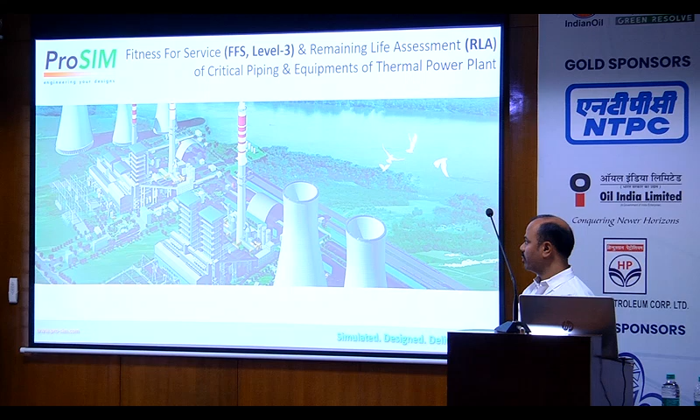This image is the typical layout of a coal-based thermal power plant. It has different systems, starting from coal handling, ash handling, boiler, turbine, generator, cooling system, and other supporting systems.

Some of these systems are subjected to mechanical loading, and some are subjected to both mechanical and thermal loading. I'm referring to the loadings because when systems are in operation, it's very complicated to find out the remaining life assessment of a particular system when it is subjected to both thermal and mechanical loading, as compared to systems subjected to only mechanical loading.

In general, most coal-based thermal power plants are in operation beyond their design life. This is because of one concept, that is return on investment. They invested huge capital on the plant, and that system needs to be in operation for a certain extended period of life.

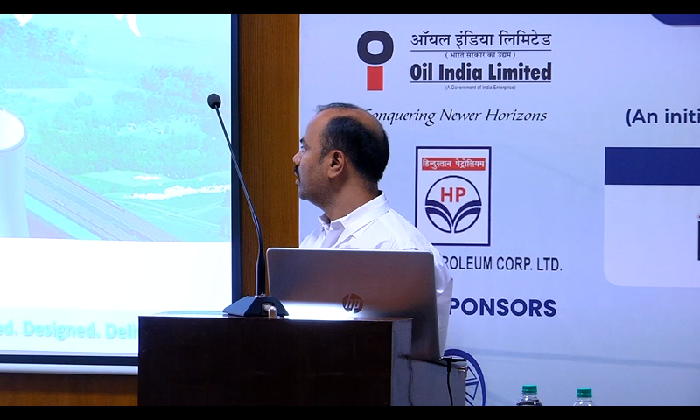In this context, we have done extensive work on remaining life assessment and fitness for service of some critical piping systems, and we have suggested design modifications and improvements using guidelines from different codes and standards. This is not only based on standards, but also actual data collected from sites, NDT techniques, and outcomes from NDT.

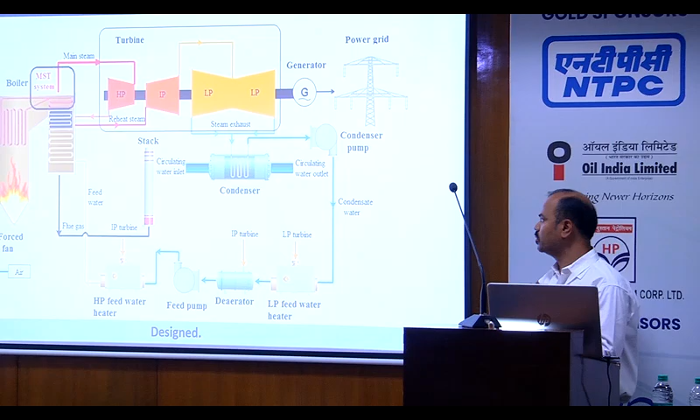Having said that, these are the major systems in coal-based thermal power plants. In this talk, I'm going to touch on only two critical systems.

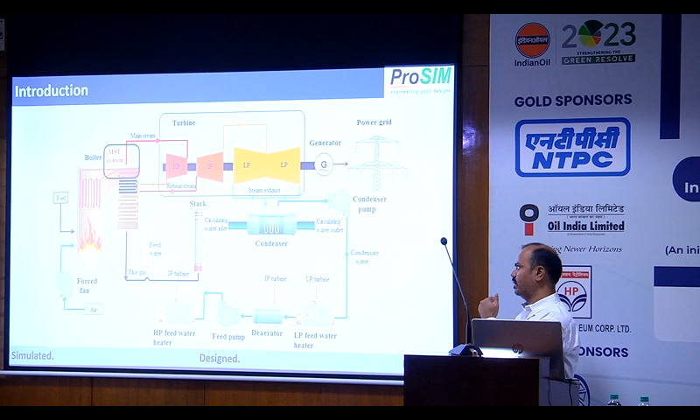One is piping systems, which are connected from boiler to turbine, and then turbine components. This includes both LP and IP turbine components, rotors, and casings, both inner and outer casings.

How do we do that? How do we assess this? The assessment process is very complicated, so how do we go about it?

With extensive work in this area of assessment and remaining life assessment, we have been able to generate a workflow chart showing where we should start, using different standards and codes. This is because once we have the system, if it is safe for the next couple of years of service life, then we have a basis for that.

For that, we referred to so many standards and codes available, like ASME and API, and some codes from RCC-MR. This is because creep-related properties are very difficult to get from ASME.

I'm not going into detail on each and every step, but I'll take you through a simple example for each step which we have done.

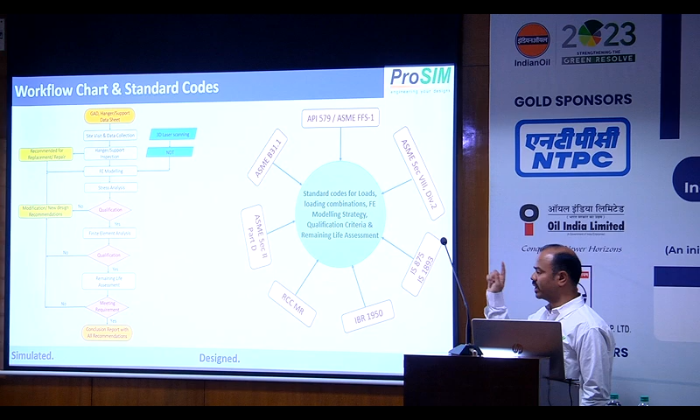For RLA of a particular piping system, it starts from site visits. These are some simple example images which we have taken from the sites.

When we do RLA of a piping system, each piping system will have more than 180 to 200 different types of supports. We visually inspect each support and take readings in both hot and cold conditions, to check whether that support or hanger is in working condition.

Or in bottom out or top out conditions. Some supports are in damaged conditions. All these conditions are reported in a systematic manner and submitted to the authority for further actions.

Further actions mean that some damage factors need to be rectified immediately during the shutdown, and they will take a call on that. Some replacement of hangers will take time, and they will decide and go for it.

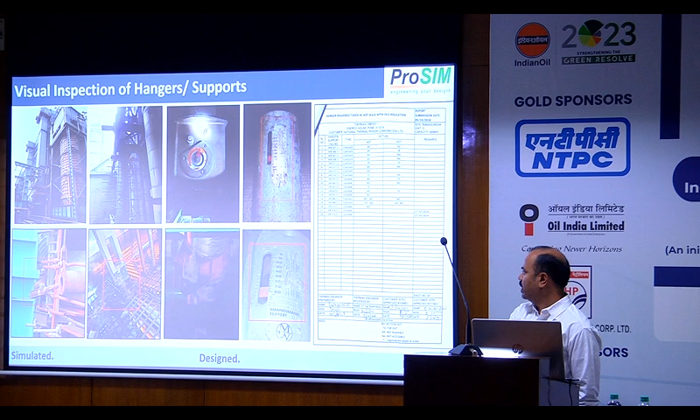This is the first step of our assessment. Next, as I said, going for remaining life assessment involves taking input from different aspects from the site, actual data from site, and NDT.

NDT basically provides two major input parameters: one is thickness, and the other is defects, if any are found.

Regarding thickness, if you can see from the image, there is one line that is the MS system, and they will conduct thickness measurement on each pipe spool and bend. Our job is to consider each spool-wise thickness in our analysis, to make sure that whatever remaining life assessment we are doing for the particular system is safe for the next specified years of operation.

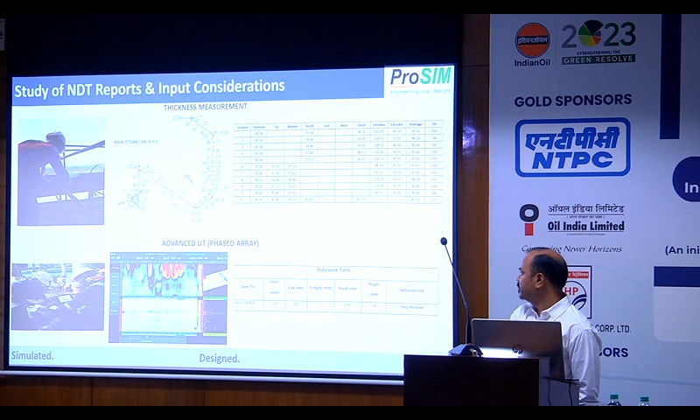That particular system was not qualifying for occasional load cases because they are not considered during their initial stage in the design. So we recommended some additional supports and hangers, some snubbers, to make sure this system is qualifying as per the standard codes like ASME B31.1.

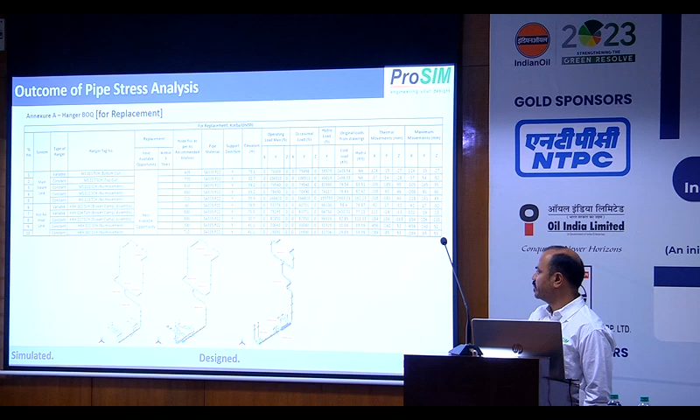Not only suggesting, but we visit site and check the feasibility of the supports, whether that support can be added in the existing structures and steel structures. We suggest where the locations need to be taken care of, the support locations, and provide the type of supports and hangers to be replaced in a neat summarized manner. This helps operators decide on maintenance or replacement of damaged hangers or supports.

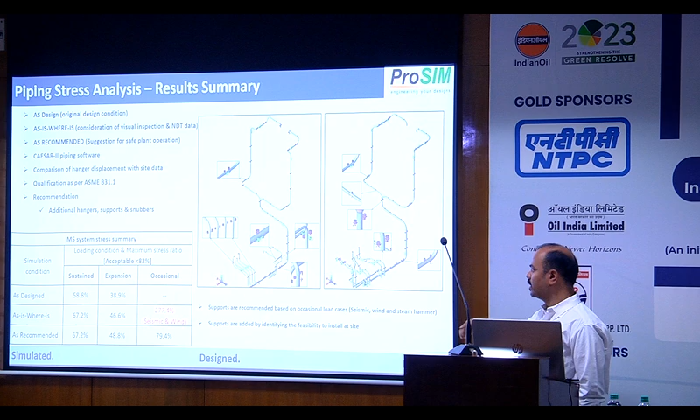Once we conclude the pipe stress analysis, there are some challenges. We cannot take parameters like operations and number of shutdowns in the pipe stress analysis directly. So we find solutions to include all these parameters.

Why? Because once temperature comes into picture, creep becomes a phenomenon in systems subjected to high temperature. Then all temperature dependent mechanical properties, number of operation hours, and number of shutdowns together form creep fatigue interactions that are included in our analysis.

We consider the output from the pipe stress analysis, the stiffness of supports and hangers, everything, and analyze the systems to find out the critical locations. For those locations, we calculate the remaining life and provide suggestions.

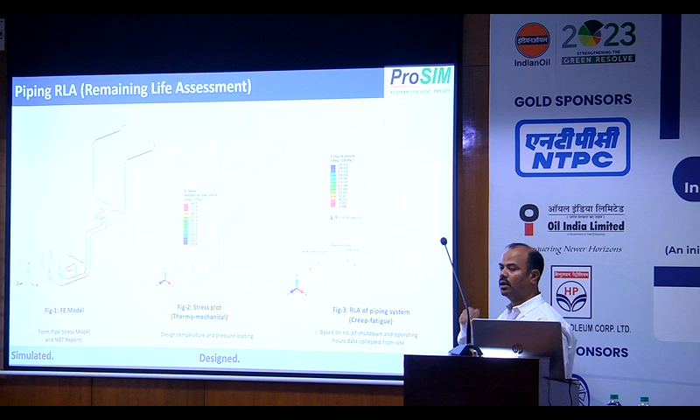Some locations are not fit for particular years of operations. Then we suggest modifications like changing the particular pipe spool after so many years, or adding additional supports. This is one example where we compared results.

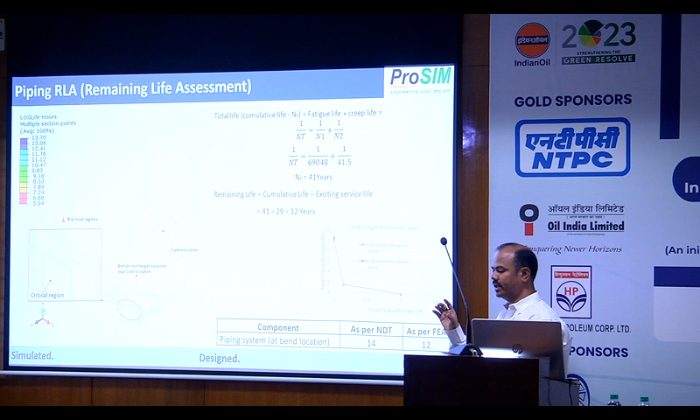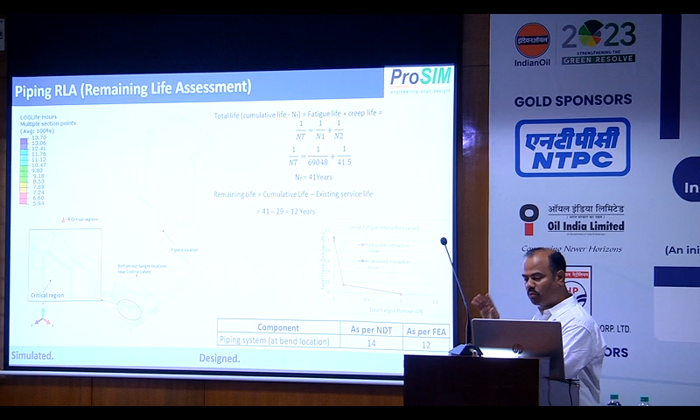Remaining life assessment can be done using empirical formulas as well, but that is limited to ideal conditions, where we generate stresses and calculate the remaining life of a component using parameters like LMP. Including LMP parameters along with analytical and numerical techniques, we arrived at a remaining life assessment that correlated well with what was calculated using empirical formulas.

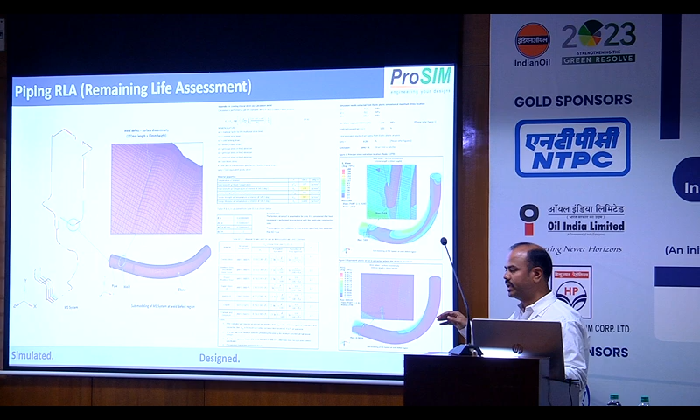Once we have defects in the piping system, we go for detailed analysis using a 3D CAD model, which should be qualified as per API 579 norms, giving limiting strain values. If the limiting strain is not within the allowable limit, we suggest whether the component should be replaced, repaired, or can continue operations for a particular period of time.

With the conclusions, we provide the locations that need to be monitored and the locations that need to be replaced. All this information is summarized in our conclusion.

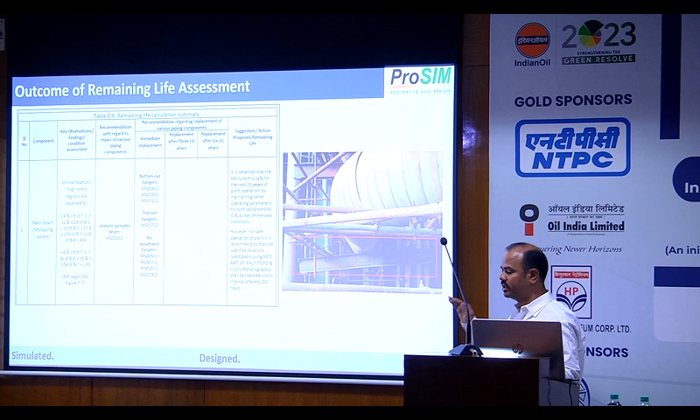One more challenge is that when we visit sites, most of the time we don't have complete input details needed for our remaining life assessment activity. One technique we use is 3D laser scanning. We did a complete turbine assembly scan using this technique, converting the laser scanning point cloud into a 3D CAD model.

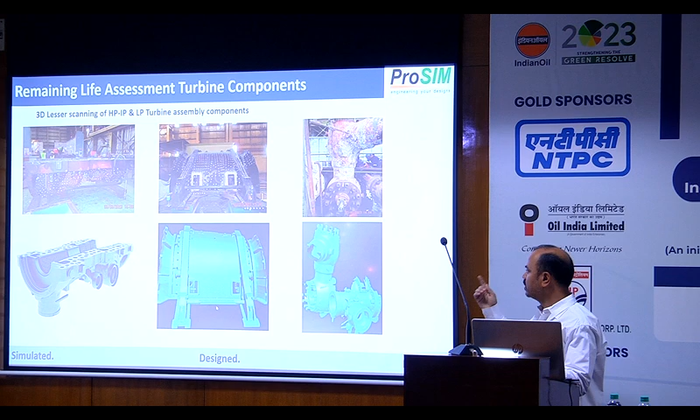This is the output from the 3D scanning of an entire turbine assembly. This assembly is used for further RLA and FEA assessment. We finally concluded that this particular component has some high stress regions, and those regions need to be checked during the next shutdowns.

With this, I'm going to conclude my summary.

Most coal-based thermal power plants are in operation beyond their service life, but they need to remain in service because of the intended return on investment. For that, we have worked extensively on the remaining life assessment of critical piping systems subjected to high temperature, and suggested modifications to improve the system so it can remain in operation for specified additional years.